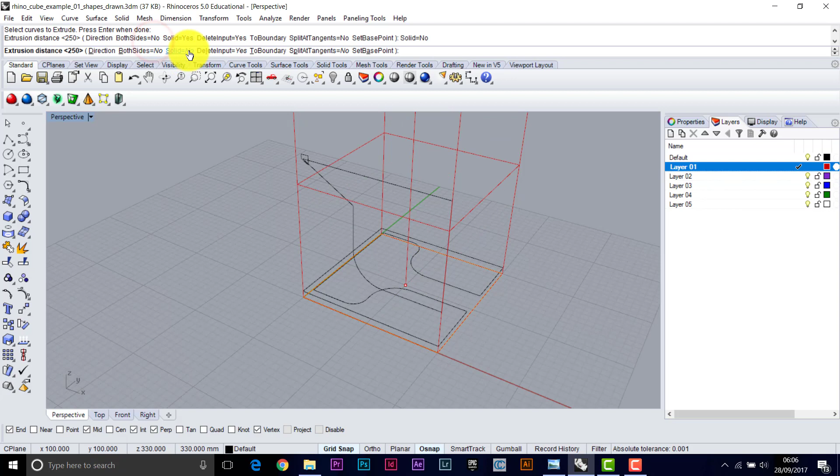Let's take the simplest shape there first and enter. And what you're wanting to make sure is that you have the solid option answering yes. So turn into solid, yes. The extrusion distance for this object is just 10 millimeters above, but we can pick points on the geometry that's already there.

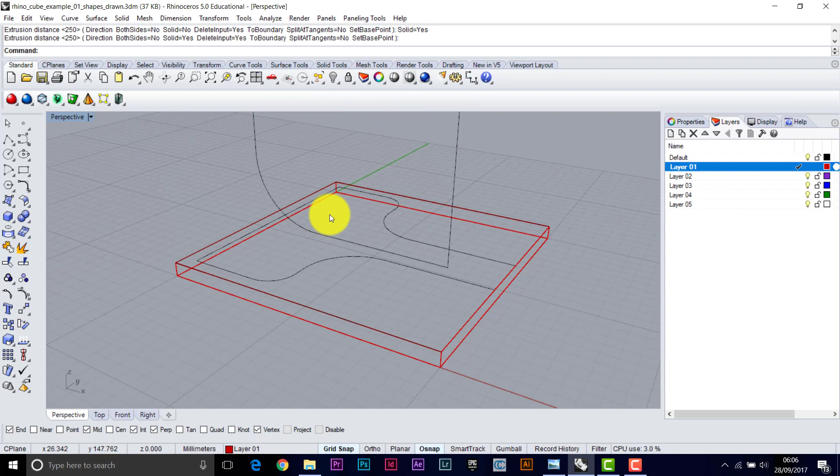Okay, we need to check that that has done it and has solidified it. So if you hit your middle mouse button, or you can render using this button. So middle mouse button, render. Okay, looks solid to me. We can stay in this solid view.

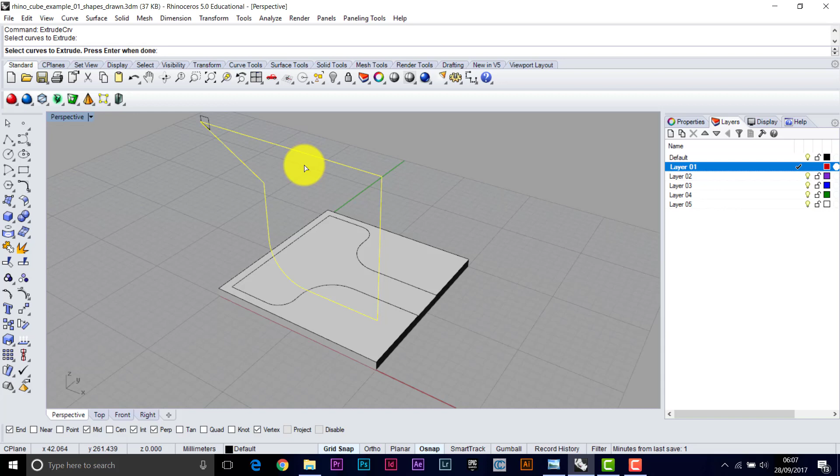Okay, we'll take this shape and extrude it to this point. So extrude CRV. Take this shape, enter, and we can select the corner of the box. Okay, turn it around, just have a little look, make sure everything's doing okay.

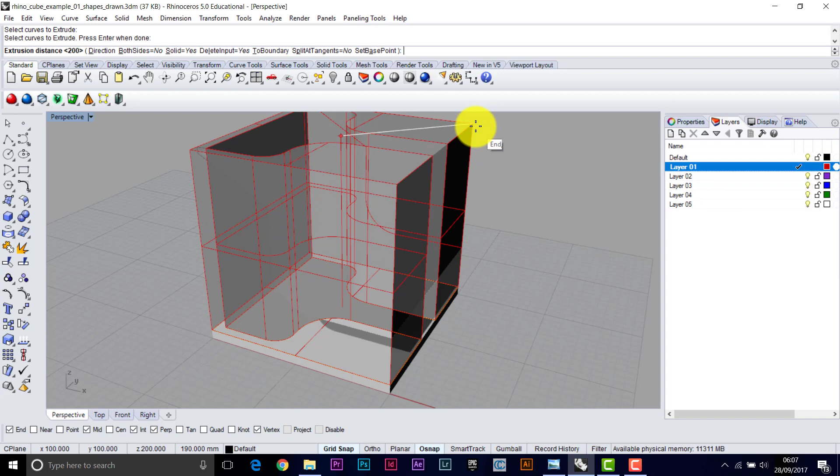Okay, next one is this shape. Let's press enter to bring back your command, pick the shape, enter, and we're going to the top point up here. Okay, now we're having trouble seeing inside. Okay, so we'll need to go back to 2D wireframe. You can access that through here, wireframe viewport, so it's right click here, or middle mouse button, right click here.

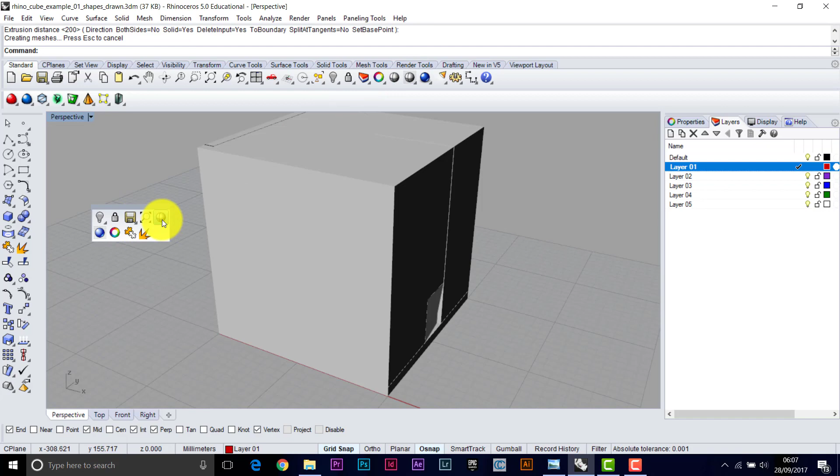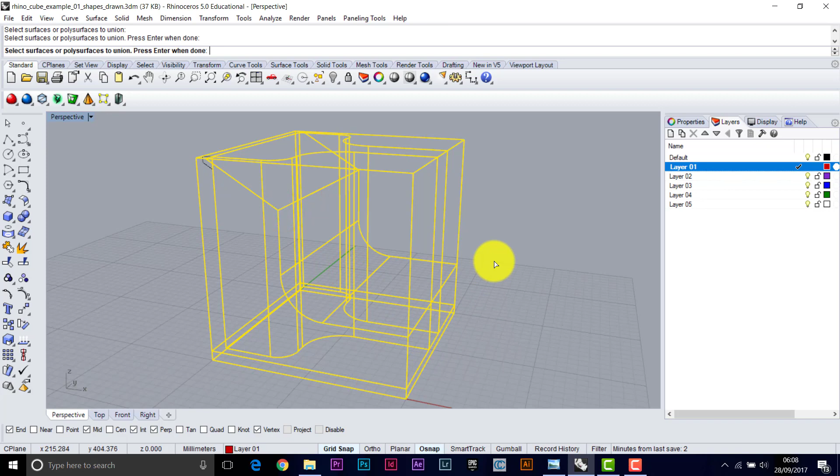Okay, so we can see inside the shape now, but the shapes are just colliding with each other. So let's union the three that we've got so far. So it's solid, union, and if you pick the three new solids and enter, we should start to see the shapes merging into each other. So we're getting a much more interesting form appearing inside.

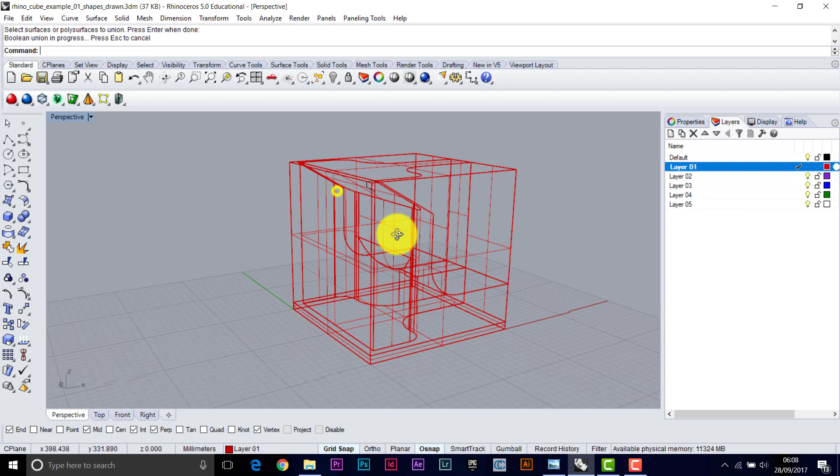There's still the kind of history of the way the solid was made, kind of imprinted around it. Okay, now we don't see that when we shade it, but we do see it in this wireframe view. Okay, so the history kind of disappears in the shaded views, but in the wireframe it does look quite unsightly.

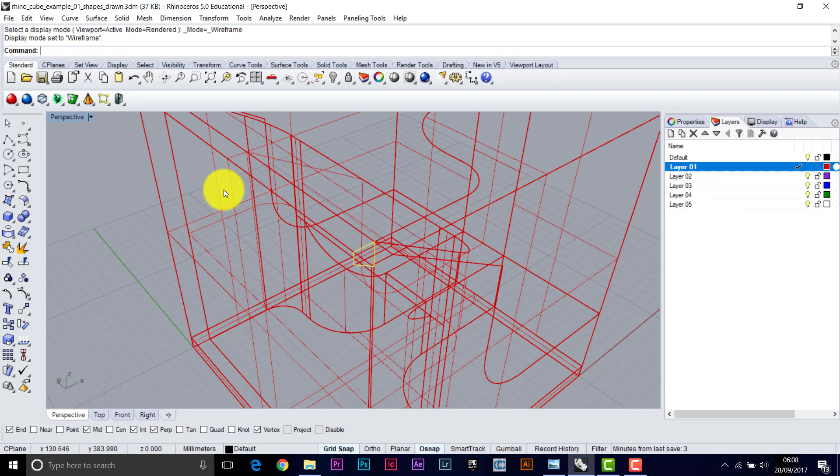Okay, and then the last object is the small extrusion here, which needs extruded 180 millimeters. So it comes to this point. So we're taking 10 off here because we've moved it, and we're taking 10 off there. So it's extrude CRV.

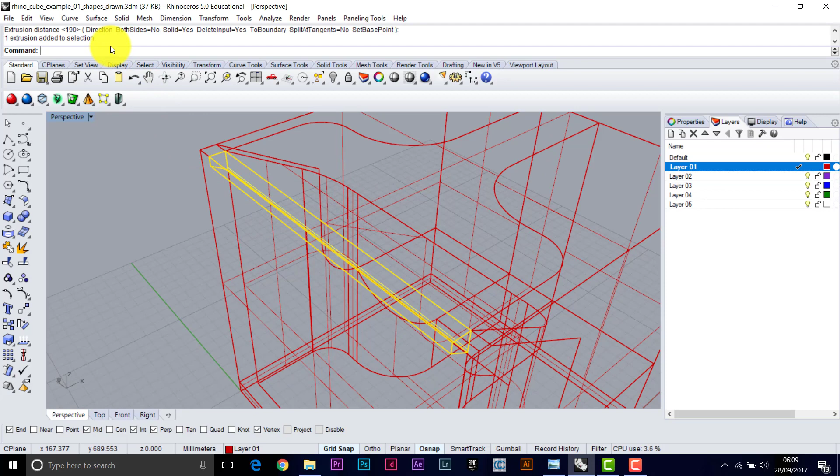Okay, it's ready to go. It's looking for an extrusion point. We'll go to the inner corner there, and this time this object gets subtracted, and in Rhino terms that's called a difference. So it's solid, difference, pick your main solid first, enter, then pick the smaller shape that's getting subtracted.

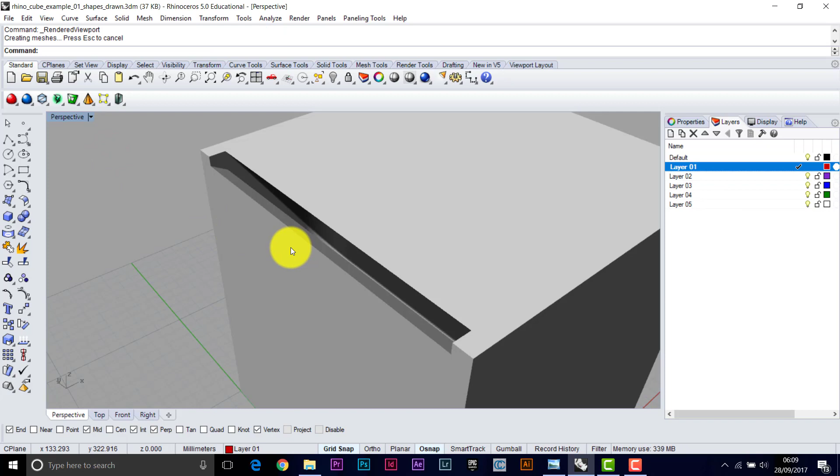Okay, so that should have generated a slot. We should see darkness inside there. We're looking into the shape. We can just see down. Okay.

Right, so what we'll try and do now is extract some 2D information from this. Let's get back to 2D wireframe. Okay, we'll go back to our top view and see what we can do as far as getting some 2D info from it. So I'm going to change layer just so that anything new comes into a layer that I can get hold of. Okay, so there's a few options here.

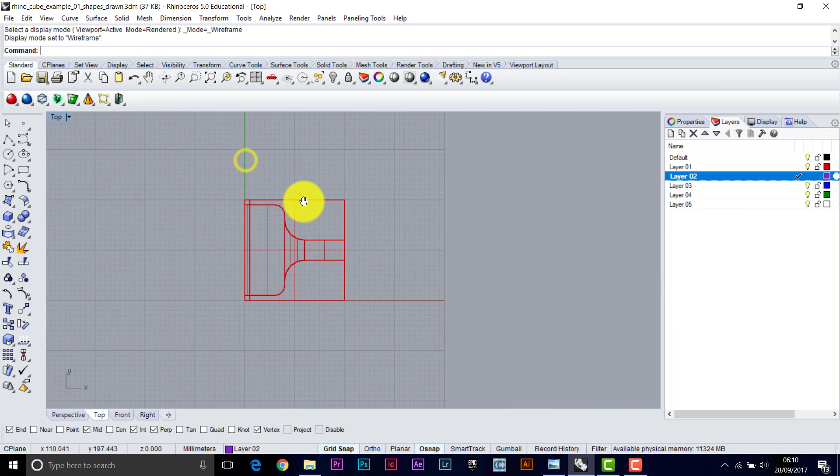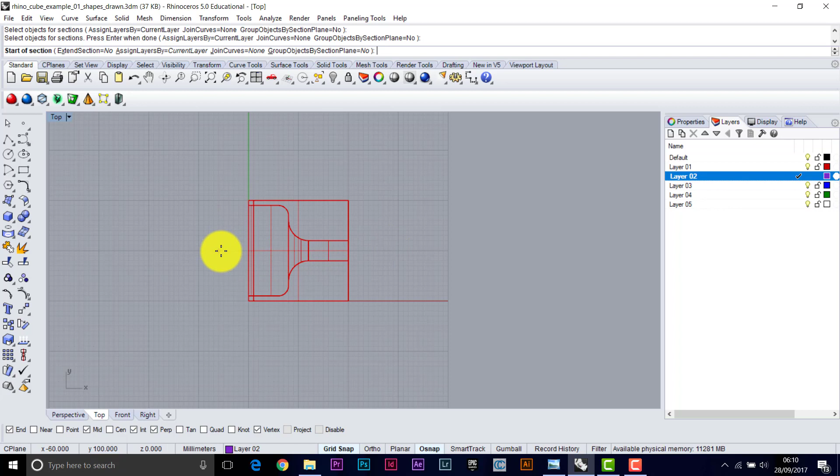If we go to curve from objects, section, okay, and then select the object for the section, it would be our solid, enter. So say we wanted a very simple section right down the middle, vertically. Okay, so just pick start point for the section, endpoint for the section. Okay, and it's done.

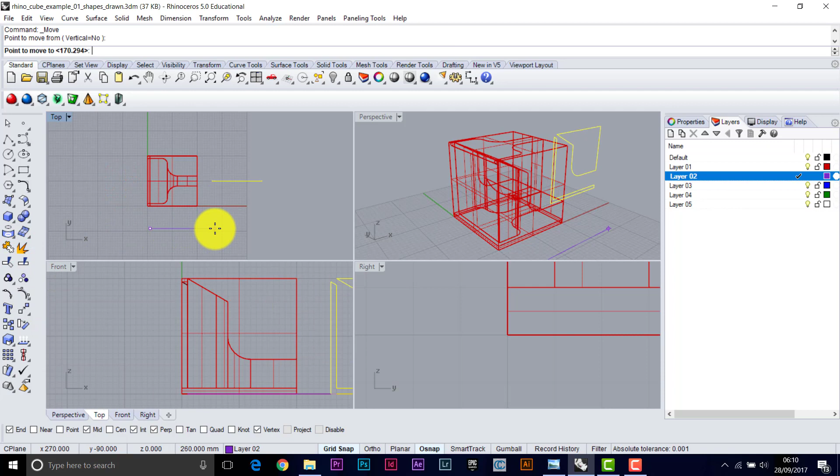Okay, you can see the section is lurking inside there. We could then move that outwards, so we could use it, rotate it over onto the ground. Okay, but what we don't have is any background, it's just hollow. Okay, similarly, if we do a section vertically, so if we want to do a section in this direction, okay, and because these aren't looking in any particular direction, you just get the cut line at that point.

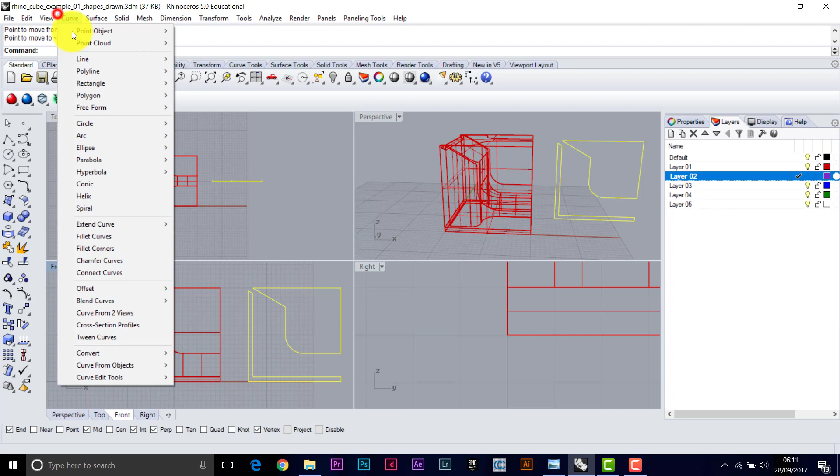So it would be curve from objects, section, so we're going this way this time. Oh, sorry, try that again. Select objects for the sections, enter, then set your section line. That's better. Okay, you can see the section there, and before it gets muddled in, we'll move that out so we can see it. Okay, but like I say, there's nothing visible below or above. We can't see any information.

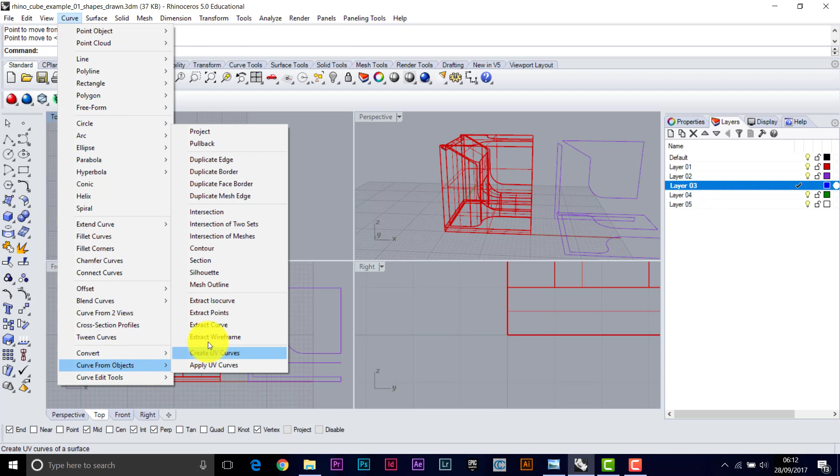Okay, let's change layer again, just so the next ones come out a different color. And what we can try now is generating some contours. This is quite a nice way of viewing the shape inside. So curve from objects, contour. Okay, select the object for the contours, enter.

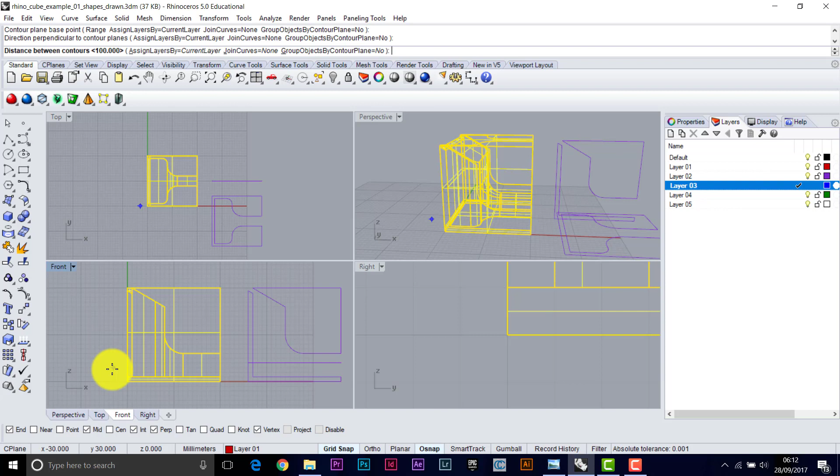The base point, let's say we start our contours at the ground. It's asking for a direction for the contour, so if I want horizontal contours, my direction needs to be perpendicular to that, so a vertical position. And then say the distance between the contours, let's say 20, so we don't generate too many, so 20 millimeters, enter. There's our contours. Okay, we can move those out so we can see them.

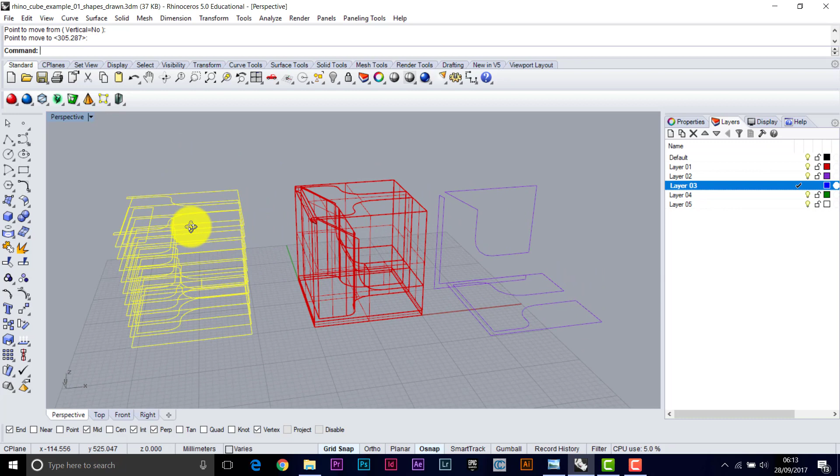And if we look at the perspective view and turn that around, you start to see the shape inside. Notice it's picked up the history of the shape on the top as well, so that top one would certainly need edited. But even with this few number of contours, we can see the shape kind of curving into the background there.

Now there's another more automated thing you can use, called Make 2D. But this has its limitations—it just views from the outside. So let's try Make 2D and see what happens.

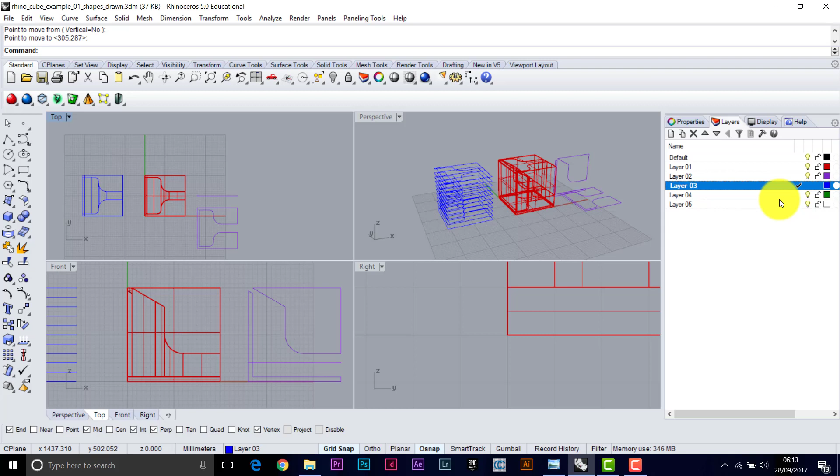This is probably going to make its own layers anyway, so choosing a different layer isn't really necessary. So the command is Make 2D, enter, pick the object, enter.

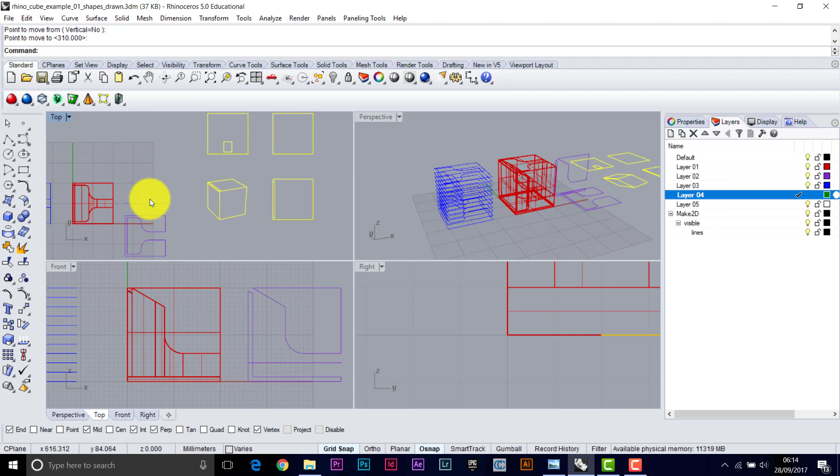We would go for 4 views. Let's move that out of the way so we can see what we've got. You can see the layers have been automatically generated, but obviously this is quite limited. It's just viewing the object from the outside, so there's not a heck of a lot to see—useful, but not a lot to see.

So I'm going to save that, and open a slightly different version of this. Let's save this as modeled and sectioned.

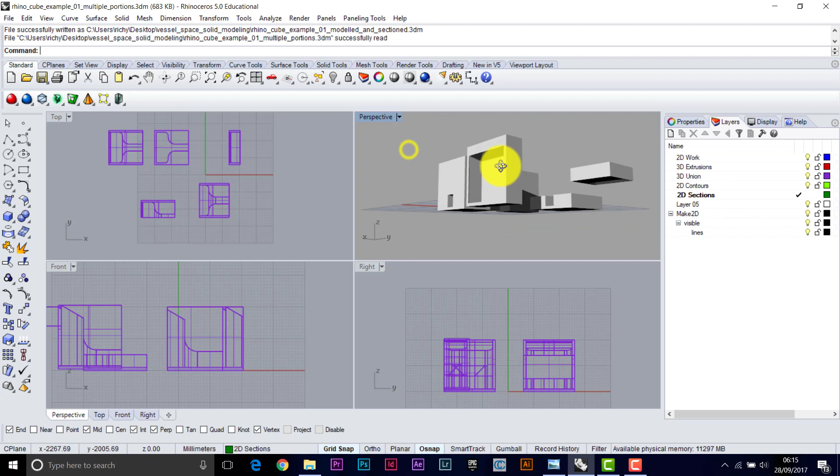I'll open a slightly different version that's got the same model, but it's been broken up into chunks. I've got one called multiple portions—I've taken the same model and done Boolean differences on them to generate portions that are looking in different directions, kind of plans looking up and down, etc.

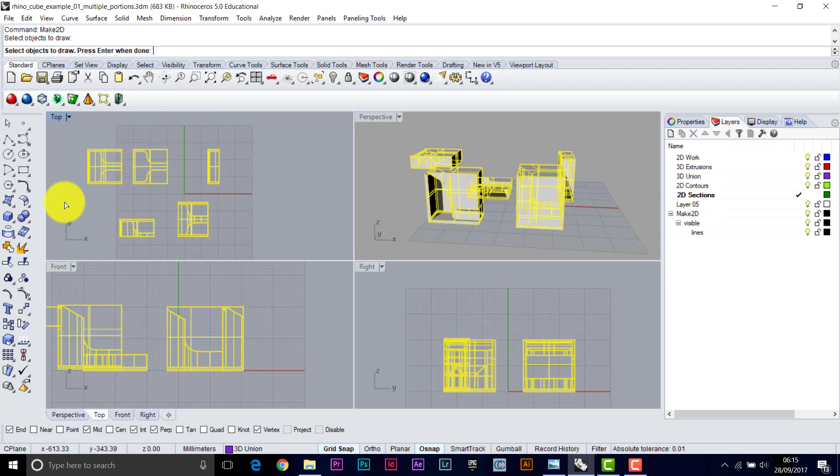What we could do is make 2D on this. This is going to generate a lot of stuff. So, make 2D, grab all of these, enter, 4 views, OK. We've got all sorts of things we can add onto here—these have all been default added, so I think they're all going to show.

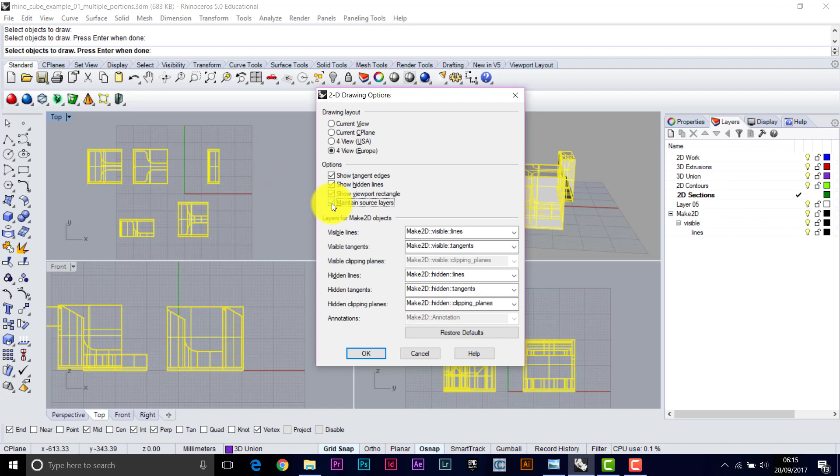Oh, actually, here we go—put the ticks on for everything there, just to generate a lot more information. Let's move these before we get all messed up. So you see it's generated a lot more 2D info.

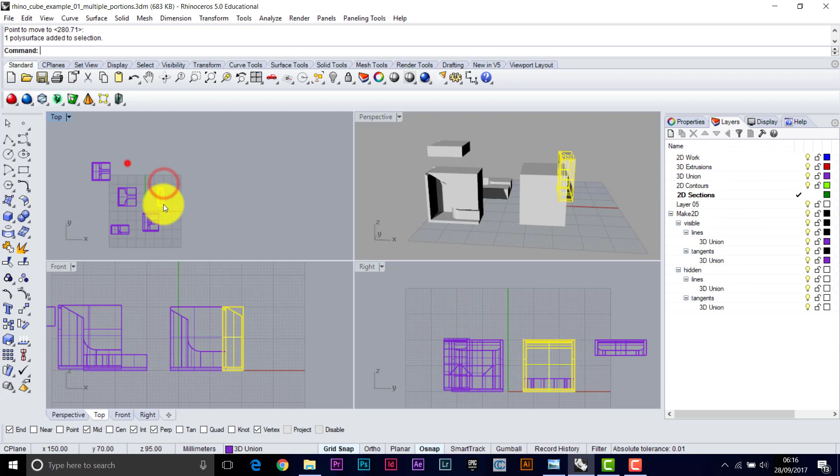But it's all overlapping each other, which is a wee bit awkward. So what we need to do is reposition the objects first so there's some kind of cascade—nothing can be overlapping the previous object—so it's got a chance to generate views from the 4 sides.

So if you give that a go, we'll make 2D again. Might help if they were all at the same level, but they're looking not too bad. So make 2D—but we'll get rid of these layers just now, and I think we can delete all those. Yep, bye bye.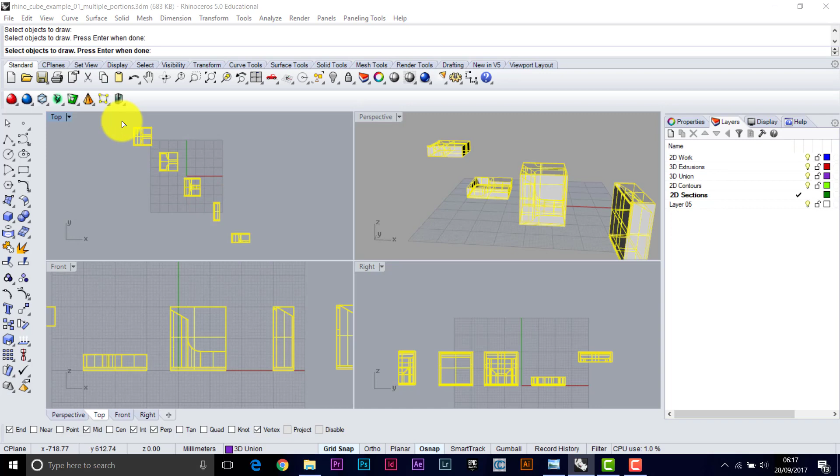So we'll Make2D, grab all the objects and enter. We've got ticks on for everything. I'm going to turn this one off so it generates its own layers instead.

Things are spread out a bit more now, but that's not a problem—just a case of moving things around. But it's tricky, difficult to see what's going on here. We've got a lot of hidden information as well—the isocurves are showing up in some places. This is looking a bit bizarre, isn't it?

The 3D ones are probably not much use there, so probably delete those, just get those out of it straight away. Then you're looking at this and seeing which bits you can use, which bits are not much use. There's a lot of 2D stuff generated automatically there. You'd export that to AutoCAD and work your way through what's in the background or foreground, but it's a bit tricky.

So what we'll do is take the model from Rhino into AutoCAD, and I'll show you another sectioning tool that's got a bit more control. It allows you to sort things out and determine which views you want, instead of it just firing tons of views. This is a little bit clumsy, a bit messy—but it's fast, and it's up to you if you want to do more editing afterwards, or set up something with more control to start off with.

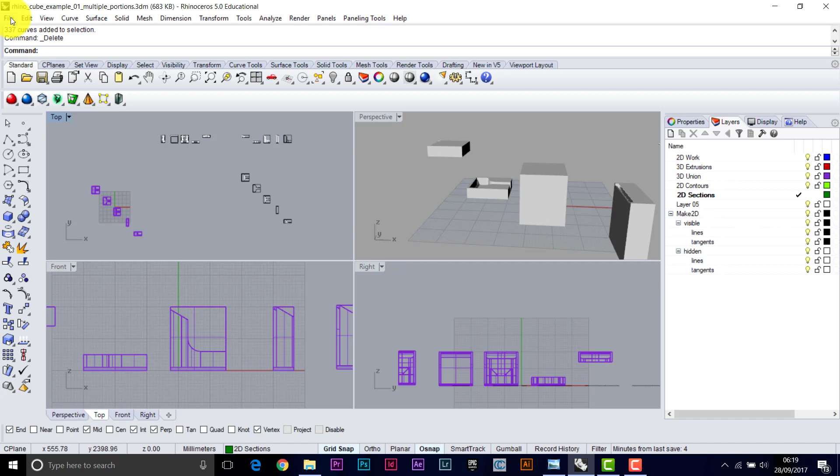So what we'll do is export just the 2D shapes from the original drawing. I'm going to save this as portions made 2d, so people can see that later on, and go back to our drawing, which was modelled and sectioned. Actually, shapes drawn is the file—it's these that I need to export to AutoCAD.

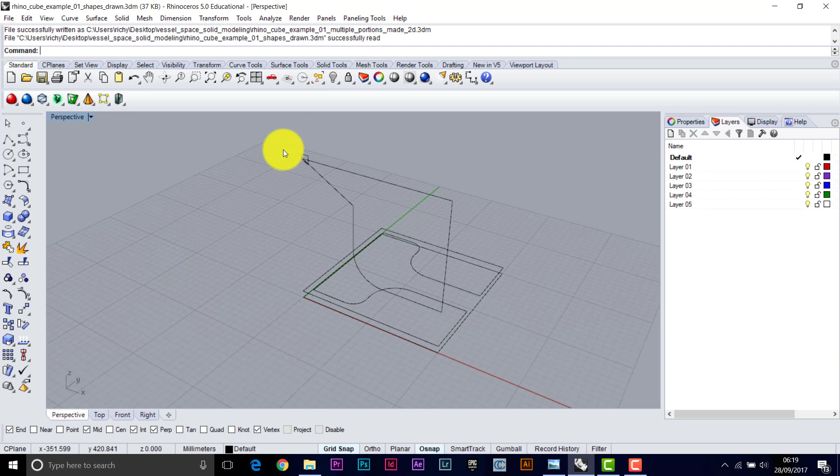So I'm going to grab these and then File, Export Selected as an AutoCAD DWG, if I can find it—AutoCAD DWG—and I'm just going to call this the curves, and drop them onto my desktop. We'll pick this up again in AutoCAD next, and show you how you can section the model using that software instead.